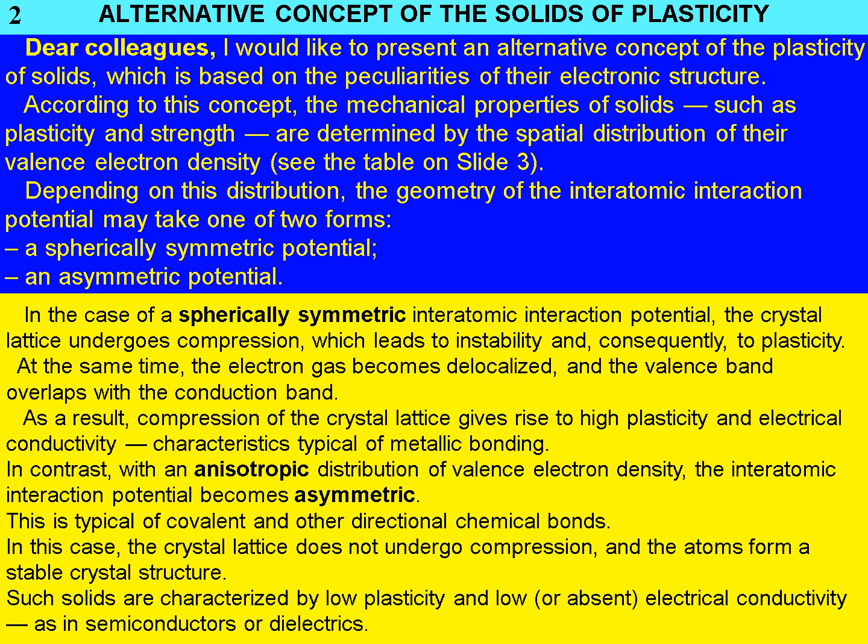Slide 3, Distribution of the valence electron density in solids. In the case of a spherically symmetric interatomic potential, the crystal lattice undergoes compression, which leads to its instability and plasticity. Conversely, an anisotropic distribution of valence electron density results in an asymmetric interatomic potential. This is typical of covalent and other directional chemical bonds. In such cases, the crystal lattice is not compressed, and the atoms form a stable crystal structure.

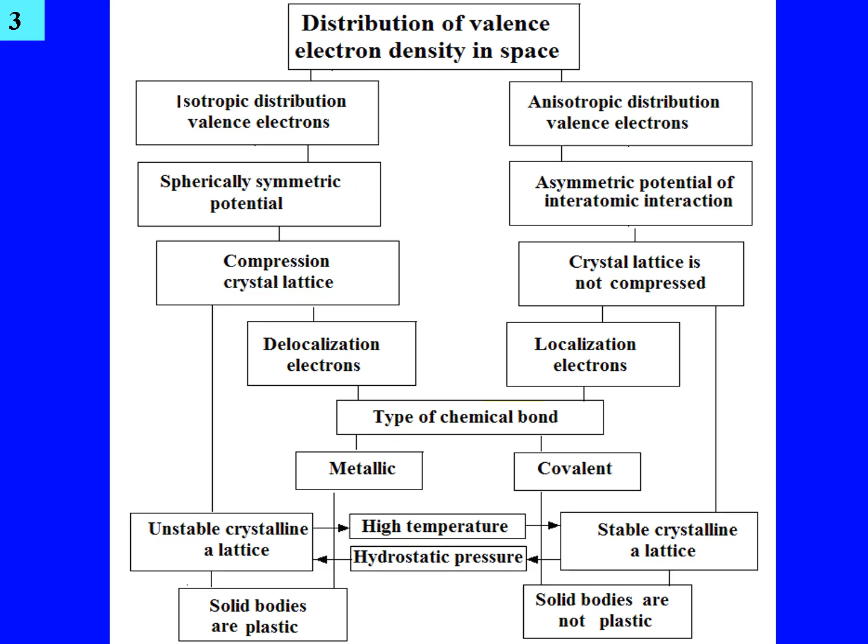These solids exhibit low or zero plasticity and electrical conductivity. Such materials include semiconductors and dielectrics. When the crystal lattice is compressed, delocalization of the electron gas occurs, and the valence band overlaps with the conduction band. Therefore, lattice compression gives rise to the high plasticity and electrical conductivity characteristic of metallic bonding. Environmental parameters such as pressure and temperature have a significant influence on the stability of the crystal lattice.

Slide 4, Causes of crystal lattice instability. To investigate the causes of lattice instability, well-known experimental and theoretical data were analyzed. These show that under high hydrostatic pressure, all solids exhibit plasticity and electrical conductivity. This indicates a transformation effect. Under sufficient hydrostatic pressure, all solids acquire metallic properties.

Given the inherently high plasticity of metals, a hypothesis was proposed that internal forces exist in metals, capable of compressing the lattice. The cause of this compression is a spherically symmetric, or nearly symmetric, interatomic potential. With such a potential, long-range attractive forces between distant atoms are balanced by repulsive forces between nearest neighbors.

As the lattice compresses, the potential energy of the atoms increases, Figure 1, and the atoms occupy positions that do not correspond to their minimum potential energy. This is the root cause of crystal lattice instability. Compression plays a key role in understanding this instability.

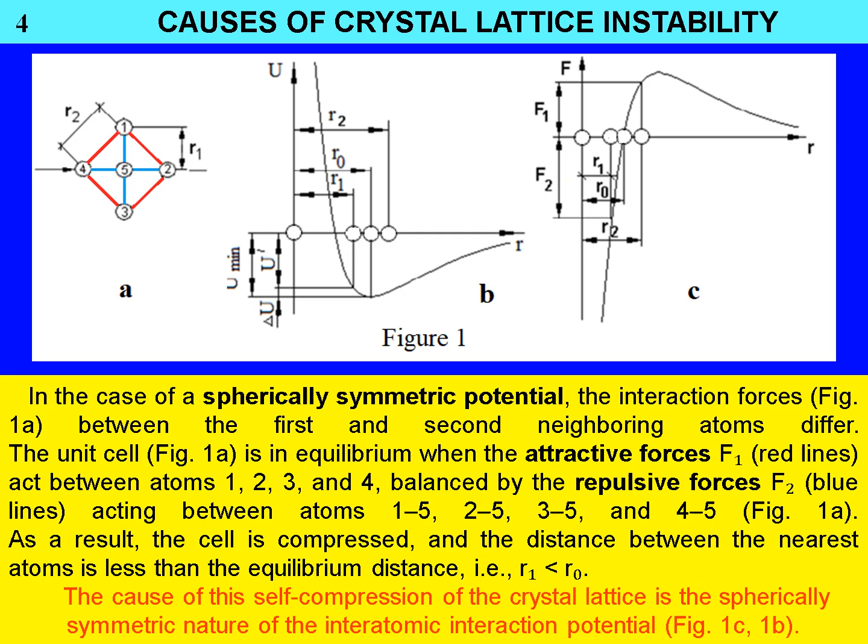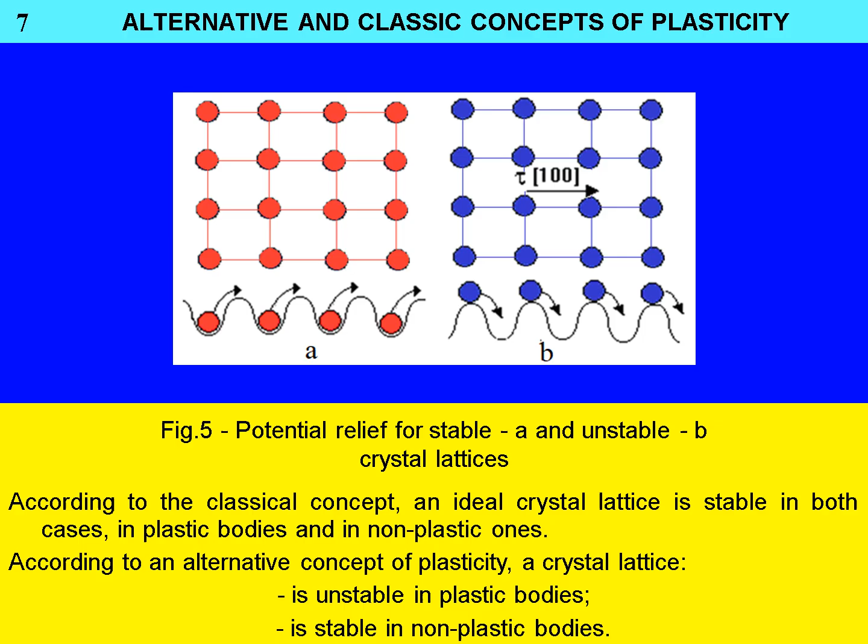Slide 7, Alternative and classical concept of plasticity. The classical concept assumes that the ideal crystal lattice of solids is stable, Figure 5a. Therefore, considerable energy is required to shear atomic planes. Plasticity in such solids is attributed to the presence of dislocations, which are local unstable regions in a stable lattice. In the absence of dislocations, plastic deformation is considered impossible. By contrast, the alternative concept proposes that the crystal lattice of plastic solids is unstable, Figure 5b, which explains their plasticity.

Slide 8, Alternative crystal model and its plastic deformation. Figure 6 presents a model of a crystal with an unstable lattice. The crystal has a two-phase structure. One phase consists of interior atoms, white circles, which form an ideal crystal lattice. These atoms occupy positions that do not correspond to their minimum potential energy. They are held in place by surface atoms, black circles, which belong to a second phase with a different structure and properties. Such a crystal is metastable.

When tensile stress is applied, Figure 6a, it primarily affects the surface atoms, while the interior atoms do not experience this stress. Once the stress reaches a critical level, interatomic bonds between the surface atoms break. At the rupture point, atomic planes, Figure 6b, shear by one or more interatomic distances via a sliding mechanism. The energy of this displacement is compensated by a decrease in the potential energy of the atoms.

As a result of this shear, the interior atoms move to positions of minimum potential energy. Further displacement from these positions requires significant force, indicating local strengthening. Thus, sliding transfers to other atomic planes that have not yet undergone displacement.

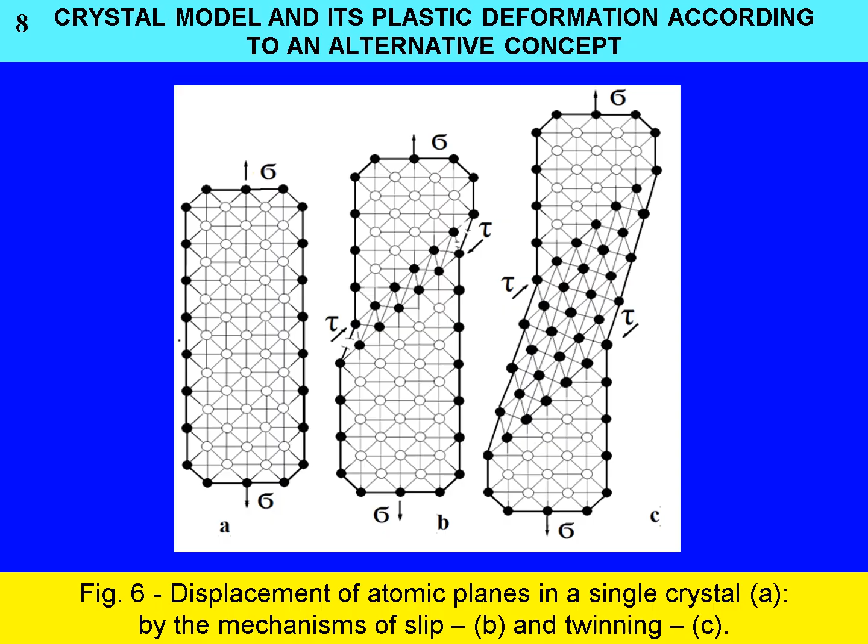Slides 9 to 10, Difference between models of plastic crystals. It is important to emphasize that plastic deformation, as described by the dislocation model and the alternative model, proceeds in fundamentally different ways. 1. Deformation mechanism. In the dislocation model, shear of atomic planes occurs through the sequential movement of individual atoms, Figure 7a, Slide 9, and the lattice is restored after the passage of the dislocation, Figure 7a, position 4.

In the alternative model, entire atomic planes shear simultaneously, disrupting the lattice structure, figure 7b, positions 3 and 4. 2. Hardening mechanism. In the classical model, hardening arises from the multiplication and interaction of dislocations, which impede each other's motion. In the alternative model, once atoms shear from unstable to stable positions, further displacement requires stresses approaching the theoretical strength. This leads to hardening and causes the shear to transfer to other planes, figure 7b, position 4.

3. Scope of applicability. The classical dislocation-based model explains only the elementary act of plastic deformation, namely, the shear of a single atomic plane by one interatomic distance. To explain further deformation, various additional mechanisms are needed: screw dislocations, twinning, grain boundaries, helical, partial, Lomer, Cottrell and prismatic dislocations, dislocation sources, e.g., Frank-Read, and cross-slip mechanisms.

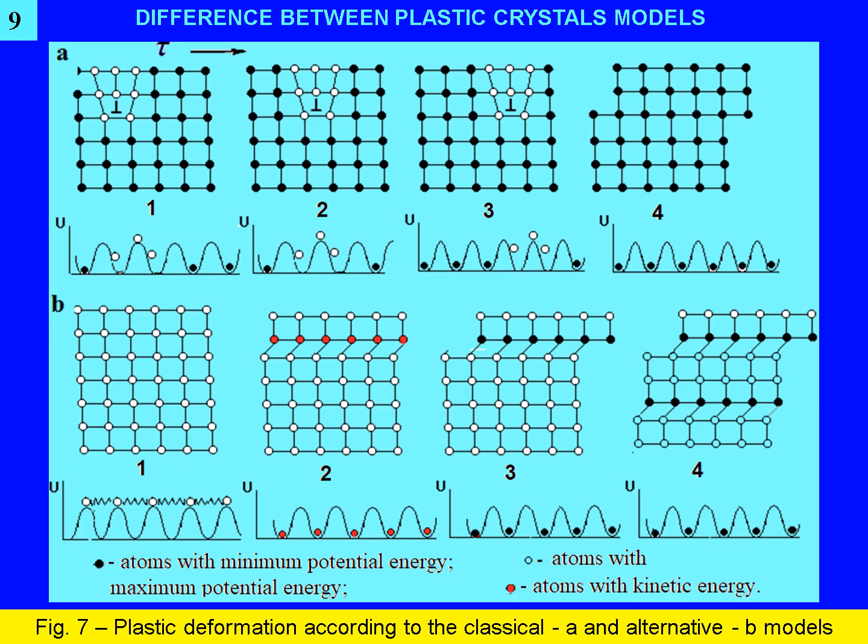In contrast, the proposed model explains atomic plane shears without invoking any defects, since the crystal lattice is already unstable. The explanation of easy shear is therefore simpler and more general. Despite these differences, the two models share several features. The cause of plasticity is crystal lattice instability, local in the classical model and global in the alternative model.

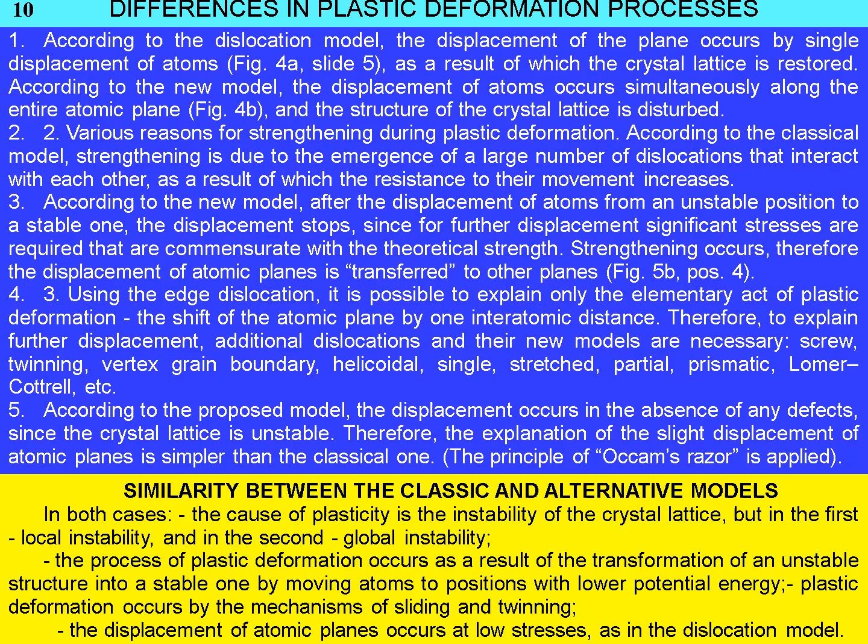Plastic deformation results from the transformation of an unstable structure into a stable one through atomic displacement to positions of lower potential energy. Plastic deformation proceeds through mechanisms of slip and twinning. Shear of atomic planes occurs under low stress levels, as in the dislocation model. Slides 11 to 16, Experimental confirmation of the proposed model.

It is worth noting that, according to dislocation theory, the high strength of whiskers is attributed to their perfect internal structure and is often cited as evidence supporting the classical model. However, such interpretations overlook the role of the surface, which constitutes a two-dimensional defect.

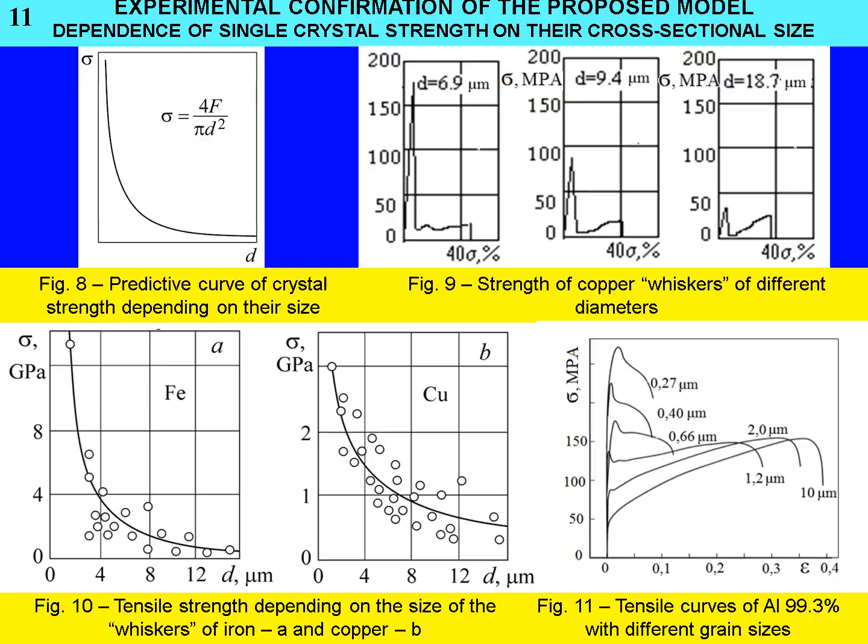Second. Slide 12, Existence of massive metal single crystals with low yield stress. According to the predicted trend, a further increase in crystal size should reduce the yield stress to near zero. This is confirmed by artificially grown, massive, high-purity single crystals with nearly perfect structures, Slide 12. These crystals exhibit extremely low yield stress, approaching zero, which provides direct evidence of lattice instability.

This conclusion is supported by statements from leading researchers. One such statement reads: Plastic flow in metallic single crystals begins at any small stress. This means that the true yield point of these crystals is equal to zero. Slide 12 presents additional similar quotations. The instability of massive metallic single crystals explains both their absence in nature and the difficulty of growing them in laboratory conditions. This phenomenon is not widely known, likely because it contradicts the classical concept of plasticity.

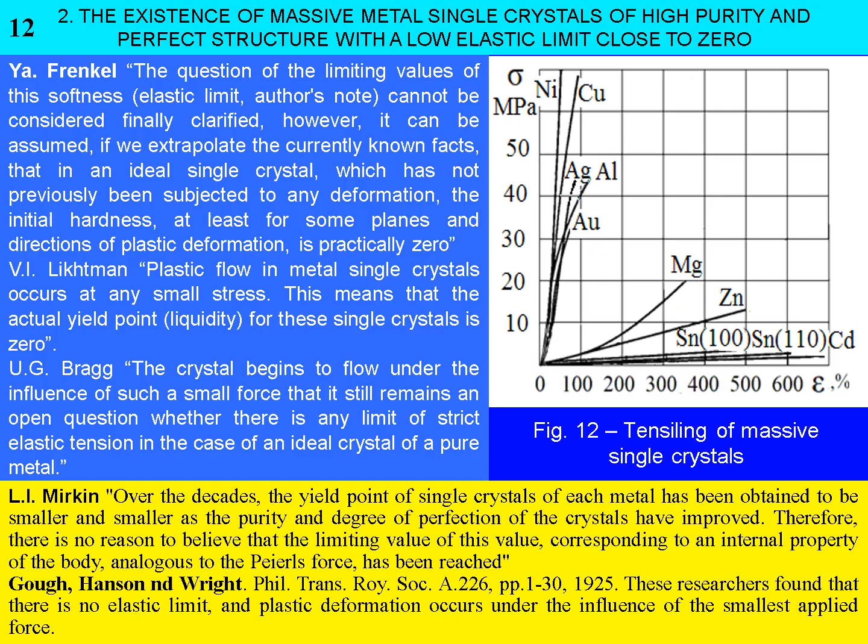Third. Slide 13, High strength of defective whiskers. Another important experimental observation is the high strength of whiskers with defects, often greater than that of defect-free crystals. As mentioned earlier, the strength of an ideal whisker is due to its surface layer, while the interior does not carry load. However, during plastic deformation, atoms move to positions of lower potential energy, leading to hardening. If a thick whisker is carefully deformed, its strength should significantly increase. This hypothesis has been confirmed.

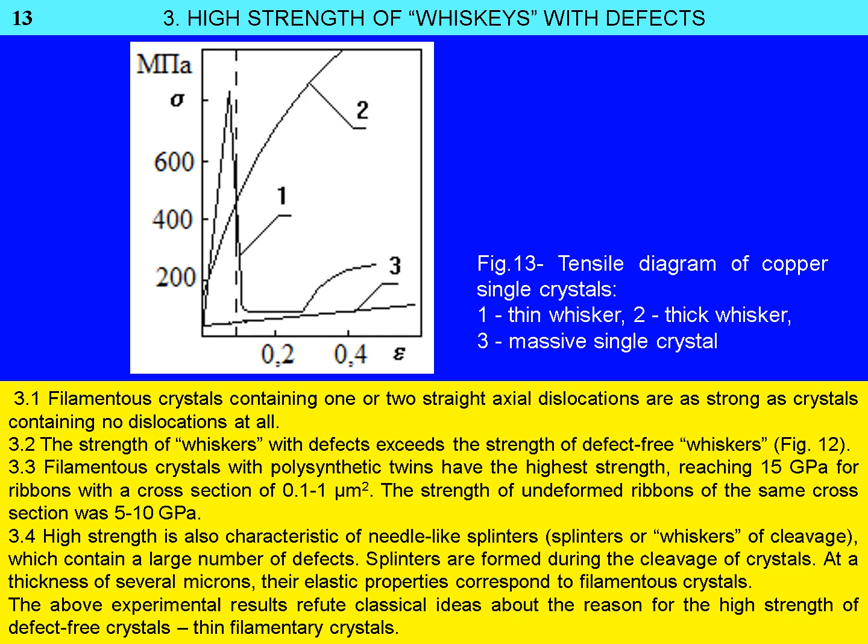Figure 13, Slide 13, shows the plastic deformation curve of a thick copper whisker, curve 2, which reached a high strength, 1200 MPa, exceeding that of a thin, undeformed whisker, curve 1. Additional data presented on Slide 13 confirm that deformed whiskers and whisker-like structures with defects can also exhibit very high strength. This contradicts the classical view that the high strength of whiskers is solely due to their perfect structure.

Fourth. Slide 14, Jerky flow, Portevin-Le Chatelier effect. Evidence of simultaneous atomic displacement during slip and twinning is found in the jerky flow observed during tensile testing of metals, Figure 15, Slide 14. This is known as the Portevin-Le Chatelier effect. The jerky deformation, visible as stress jumps, is accompanied by temperature jumps, Figure 17.

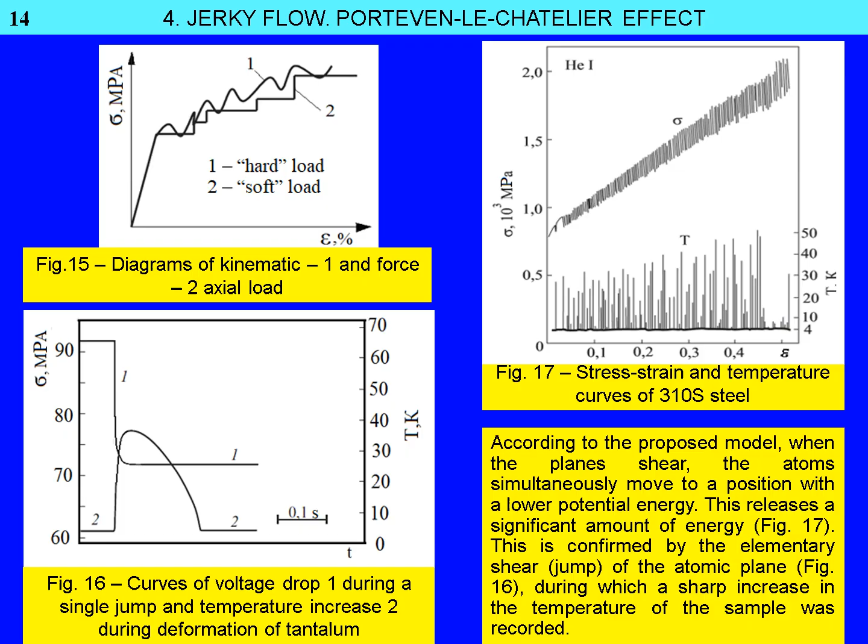Figure 16 shows a single stress drop and simultaneous temperature rise, caused by the release of heat during atomic displacement to lower energy positions. These events are also accompanied by bursts of acoustic emission, supporting the interpretation of simultaneous atomic movement during slip. Fifth. Slide 15, Confirmation of crystal lattice compression.

The hypothesis of lattice compression has also been expressed by several researchers. For example, W. Pearson wrote: Analysis of nearest neighbor diagram suggests that, in metals with the A2 structure, which are easily compressible, the atoms are slightly deformed in the direction of contact with the 8 nearest neighbors. This explains the shortening of interatomic distances in contacts with 6 atoms, the second neighbors, where the experimentally observed distances are slightly shorter than the normal atomic diameter. Slide 16, Dependence of metal's strength on defect density for both models.

This slide presents the dependence of metal strength on defect density according to both the classical and alternative models. In the classical model, defects, dislocations, have a dual effect on metal strength, Figure 14a. A decrease in their number increases strength, as the structure approaches the ideal. Conversely, an increase in dislocation density also strengthens the material, this time due to enhanced resistance to dislocation motion.

In the alternative model, however, the effect is unambiguous. Figure 14b, defect-free crystals have low strength, and increasing the number of defects leads to higher strength.

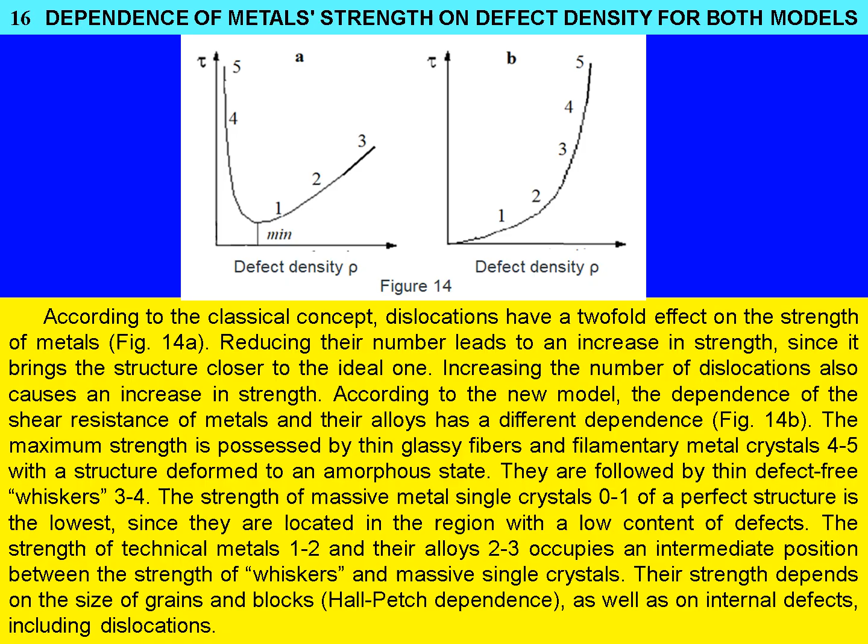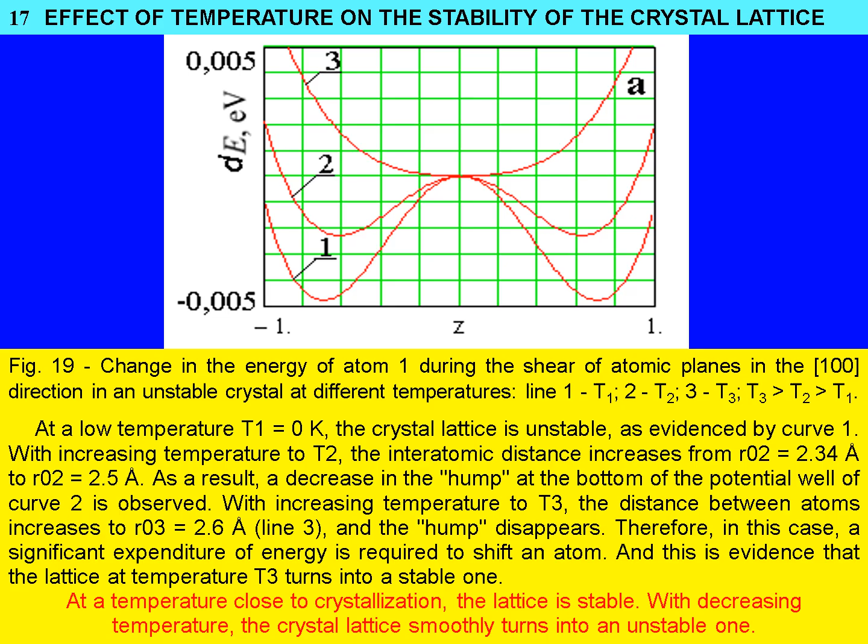Slide 17 to 20. Effect of temperature on the stability of the crystal lattice. A number of additional experimental confirmations are related to plastic deformation at low and high temperatures, which appears anomalous from the perspective of classical theory. Figure 19 presents the results of theoretical studies on the temperature dependence of crystal lattice stability. It was found that as the temperature increases, the interatomic distances increase, and the crystal lattice gradually stabilizes, curve 2. At a certain temperature, curve 3, the crystal lattice becomes fully stable.

First confirmation. Slide 18, increase in plasticity with decreasing temperature in the region of low and moderate temperatures. As the temperature decreases, the crystal lattice loses its stability, which, according to the alternative model, should lead to an increase in the plasticity of pure metals. This conclusion is supported by experimental stress-strain diagrams for aluminum and copper, shown in Figure 20. It was observed that when the temperature decreases from 350 K to 4 K, the plasticity of aluminum and copper increases, as indicated by the increase in their elongation.

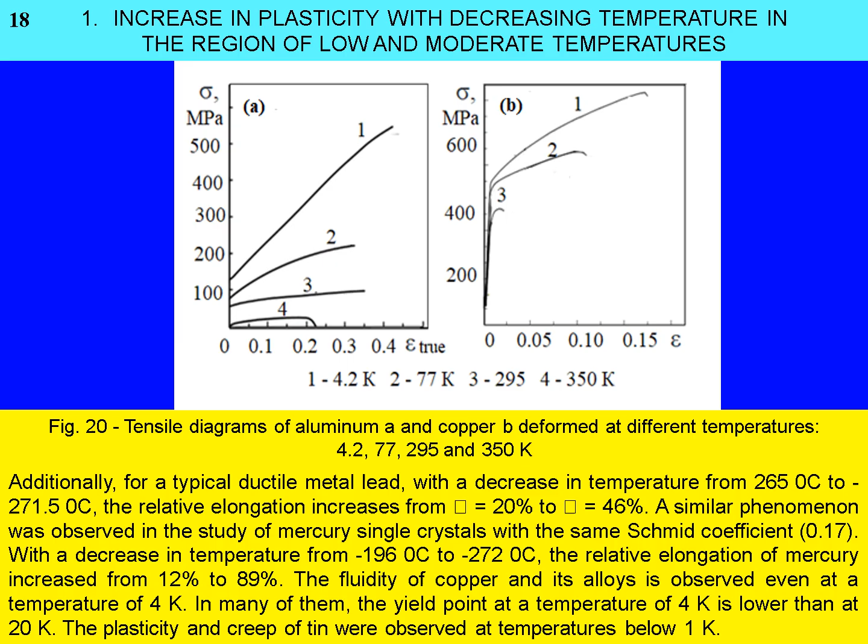Slide 18 also presents other experimental data confirming that the plasticity of metals increases with decreasing temperature. These experimental findings contradict Seeger's theory, which asserts that plasticity should increase only with rising temperature due to the enhanced mobility of dislocations. Second. Slides 19 and 20, decrease in plasticity in the high-temperature region. In the high-temperature region, the observed increase in metal plasticity with temperature, contrary to theoretical expectations, is explained by a change in the plasticity mechanism, from intragranular to intergranular amorphous diffusion.

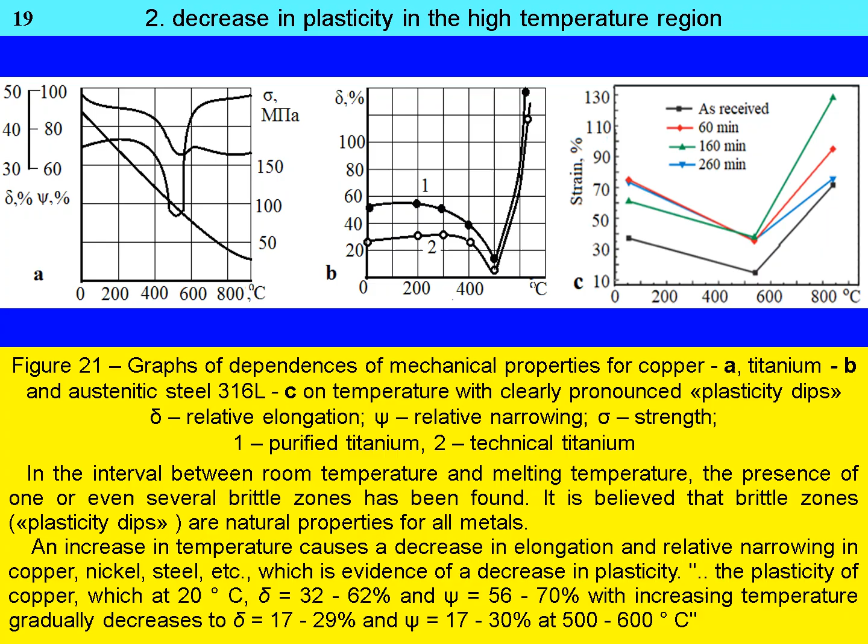According to theoretical studies, the plasticity of metals should gradually decrease with increasing temperature, and beyond a certain point, metals should lose their plasticity altogether. Above the so-called equicohesive temperature, plastic deformation of the intragranular material becomes limited. The lack of plasticity within the grains at elevated temperatures gives rise to brittle zones, known as plasticity dips, Figure 21. This phenomenon occurs in the temperature range where the grains have already lost their plasticity, while the intergranular amorphous diffusion mechanism has not yet become active. If the temperature ranges of these processes overlap, the plasticity dips do not appear.

Slide 21, Advantages of the alternative concept of plasticity. The alternative concept offers a fundamentally new and much simpler explanation of the plastic deformation process. It accounts for the anomalously low shear resistance of massive metallic single crystals, causes of strengthening during plastic deformation, the dependence of shear resistance in microsingle crystals, whiskers, on cross-sectional size, the anomalously high strength of deformed whiskers, unexplained by the dislocation model. It also explains the significant difference in plasticity between metals and covalent or ionic crystals, even in the presence of dislocations in both.

The selectivity of atomic plane slip, dislocation motion, along specific crystallographic directions. The phenomenon of brittle, non-plastic materials becoming plastic under high hydrostatic pressure. The existence of plasticity dips in metals and their alloys at high temperatures, as well as the anomalous, from the viewpoint of the dislocation model, decrease in yield strength and increase in plasticity at low temperatures. The correlation between different phenomena, such as plasticity and electrical conductivity. The anomalously high plasticity of nonmetallic crystals, e.g., silver chloride.

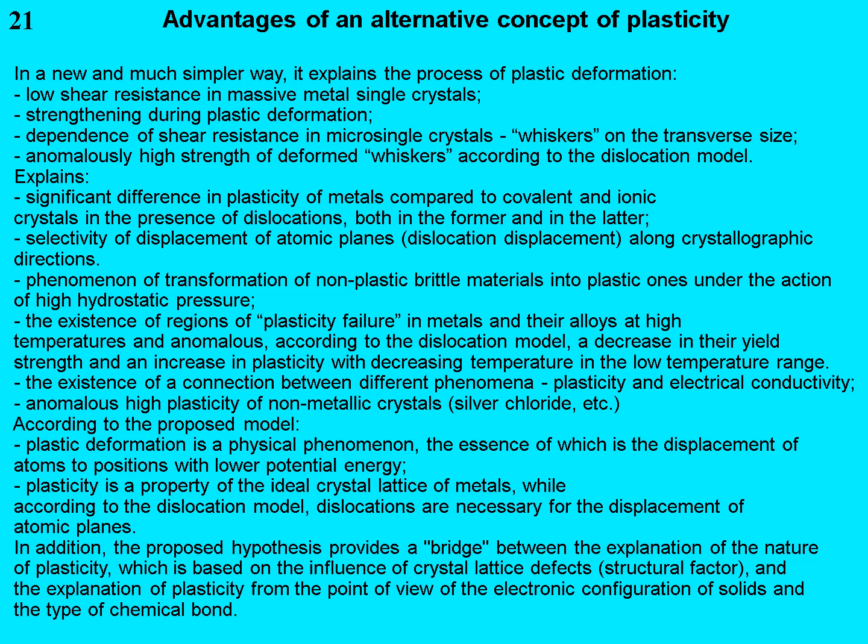According to the proposed model, plastic deformation is a physical phenomenon whose essence lies in the movement of atoms into positions of lower potential energy. Plasticity is an inherent property of the ideal crystal lattice in metals, whereas in the dislocation model, atomic plane slip requires the presence of dislocations. Moreover, the proposed hypothesis provides a bridge between two approaches to explaining plasticity, one based on lattice defects, the structural factor, and the other based on the electronic configuration of solids and the type of chemical bonding.

Slide 22, Integrality of the alternative concept of plasticity of solids. The alternative concept has been developed on the basis of a vast body of experimental and theoretical data. A number of existing theories and hypotheses are integral components of the proposed concept. These include: 1. The dislocation model of Taylor, Orowan, and Polanyi. 2. Max Born's theory of crystal lattice stability. 3. The notion of plasticity as a property of defect-free crystal lattices, early ideas by Frenkel, Stepanov, and others. 4. Physical mesomechanics, academician Panin and colleagues.

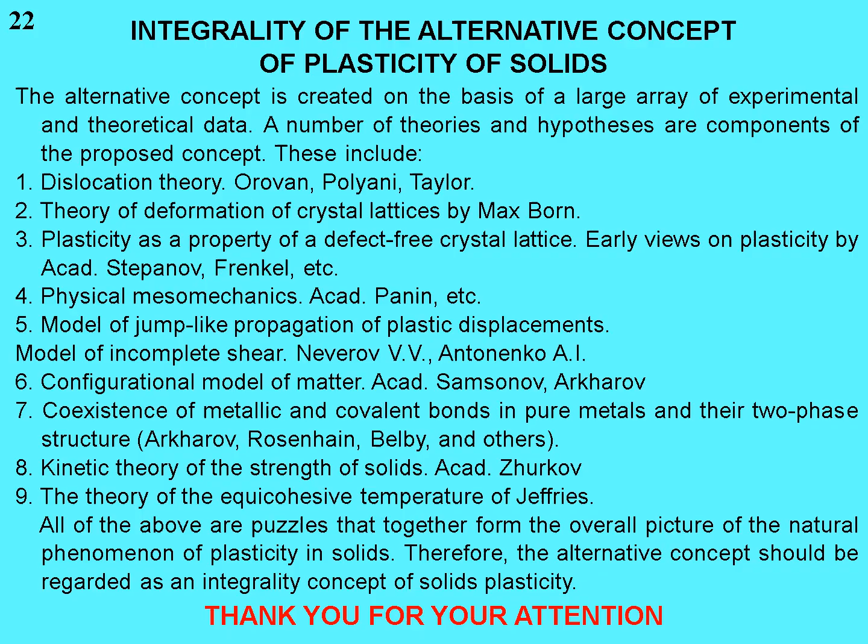5. The model of jerky propagation of plastic shears, the model of incomplete slip by Neverov and Antonenko. 6. The configurational model of matter, academician Samsonov and others. 7. The coexistence of metallic and covalent bonds in pure metals and their two-phase structure, Arkharov, Rosenhain, Beilby, and others. 8. The kinetic theory of the strength of solids, academician Zhurkov. 9. The hypothesis of the equicohesive temperature, Jeffries. All of the above are the puzzles that together form the complete picture of the natural phenomenon of plasticity in solids. Therefore, the alternative concept should be regarded as an integral concept of solids plasticity. It is clear, however, that this concept is not yet fully complete and requires further study and development.